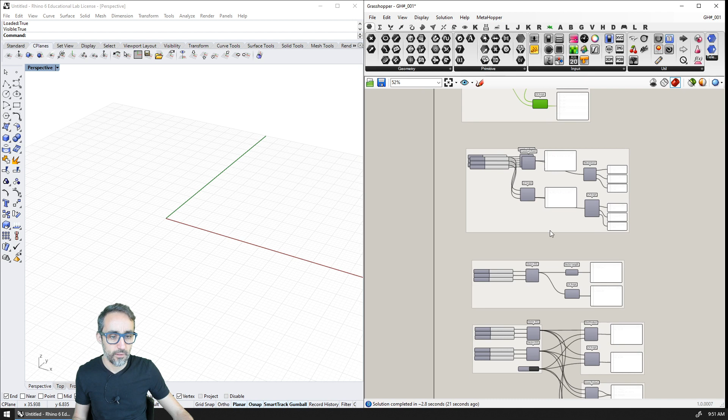Here, and here, and here, and here—where is that point coming from? Okay, we can probably just keep it there.

Random reduce, evaluate curve—I'm going to do evaluate curve today. Solid intersections and unions. Surface and curve analysis, I'll do a little bit of that. The basics functionality of Galapagos—that's a little more involved, we probably can't reach that today.

I don't think we'll get to cover that today. But doing a simple form of Galapagos, like an optimization process, isn't actually very difficult. The hard part with Galapagos is the UI and the genome and so on, but writing a component that does a small control heuristic search isn't that hard, and it's an interesting exercise. So maybe we could do that—I'm gonna write that down. That sounds interesting.

Like a simulated annealing exercise. That could be good—who said that? Karan. That could be an interesting topic for an actual stream, so thanks a lot for that. I'm gonna give it some thought.

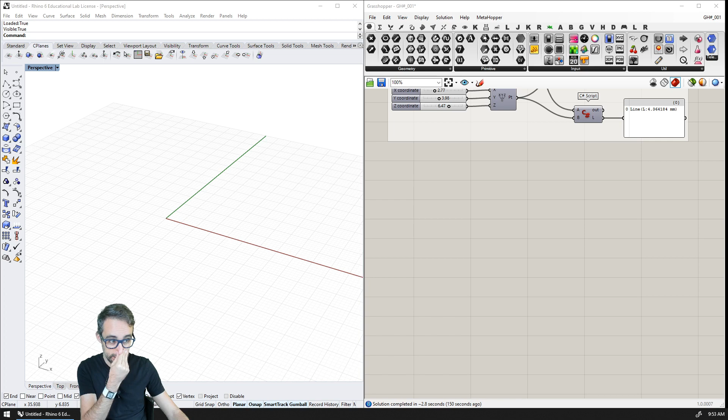So I think what I want to go over today is: I want to create an interpolated curve, having a bunch of points and creating a curve over them. I would like to evaluate a curve—given a parameter, can we find the tangent vector, the perpendicular vector, the perpendicular plane, the point on that parameter? We can also divide the curve into equal segments with perpendicular planes. I would like to loft a surface, and then evaluate a surface—given UV coordinates of that surface, get the normal vector, the perpendicular plane, and that kind of stuff.

Somebody suggested mass addition—we may want to take a look at that, I'll get back to it by the end of the stream. Again, think about which components you'd like to see, and by the end of when I finish with the ones I want to cover, we can have a small conversation, and then I can go back and do one or two of the easier ones.

Somebody's asking for forward and inverse kinematics. That's an amazing topic I do want to cover at some point, but more consistently. I teach a lot of robotics, so I want to make a playlist with basic principles of robotics, and maybe do our own robot here on Grasshopper—a robot with 3 joints, and use Galapagos to do inverse kinematics. It's not the most optimal, but it's a good, fun exercise. So maybe we can do that, but I want to do it more consistently, so it'll take some time to get there.

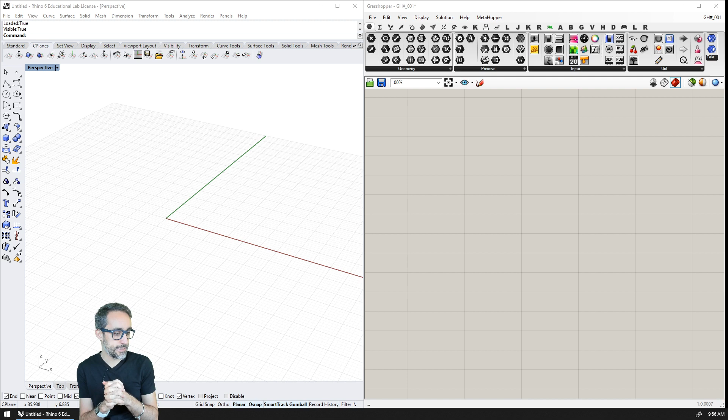Okay, so let's start with interpolated curve. Which one is that, by the way? It's here—Interpolate, create an interpolated curve through a set of points. So let me do like I typically do: I'm going to place a bunch of points, then pick them up and throw them into here. This is the degree, this is the periodic curve, and this is the knot spacing.

Okay, so we have the curve, we have the length, and we have the domain of the curve. This is going to be interesting. For example, I'm going to paste a 3 here for the degree, whether the curve is periodic or not. So that's going to be a toggle.

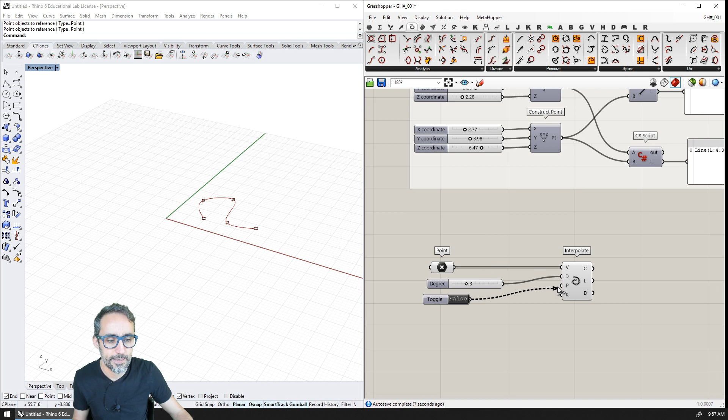And then the knot spacing is going to be chord spacing. I'm not going to bother much with that input, because it's a little complicated to explain, so we're not going to cover that today. And then the curve is going to be this, which gives me the actual curve, the length, and the domain of the curve.

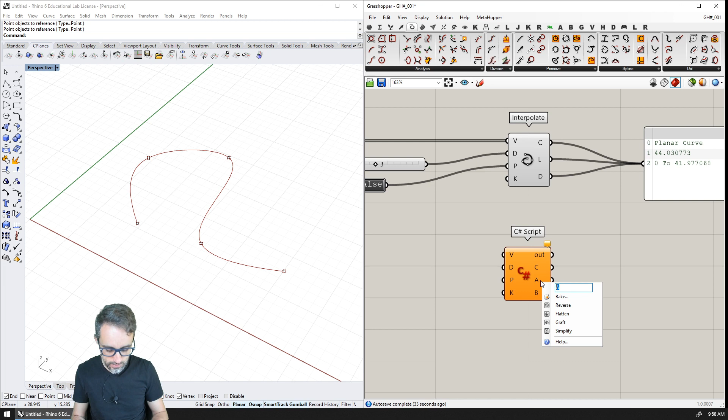Okay, and I'm going to move this down here. I'm also going to do this already. So this would be D, and then we have P, periodic or not, and the K value. And then here we have C, that's the curve. And then we have 2 outputs: L, which is the length, and D, which is the domain out.

Okay, and I'm going to toggle the parameters. I'm going to toggle them as part of the video.

Okay, also I'm going to pull up, I think it's going to be good, I'm going to pull up RhinoCommon Interpolated curve. I think this will be useful to explain what I'm going to do. Should I show this right away, or should I actually show how I got here? I'm going to do it from here so that I can show how I would get to that help screen. Okay, good.

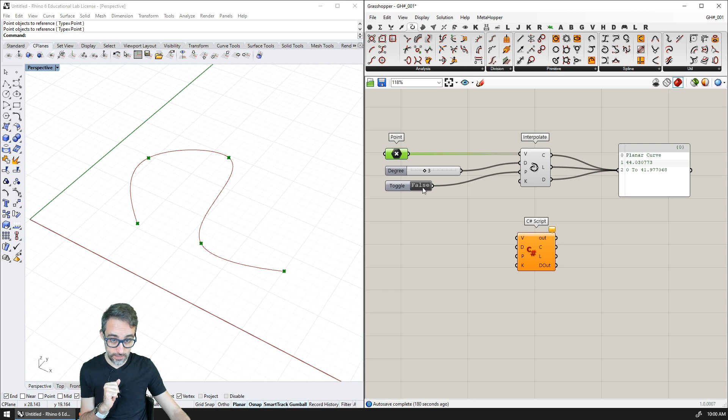So what you can see is that I already created a bunch of points in Rhino. I loaded them in here with Grasshopper. I set up parameters for the degree and the periodicity of the curve. And as you can see, the result of the component is this smooth curve that goes through the points, but also the length and the domain of the curve. I'm going to replicate all of these inputs and all these outputs.

So I already have a C# scripting component that I have dropped here. I have copied all the inputs and all the outputs, and a very strong reminder: remember that you need to right click on the inputs and set them whether you want them to be an input of a certain type. So for example, V is going to be Point3d, D is going to be an integer because the degree has to be... can the degree have a decimal part? I'm not sure it can, so I'm going to leave it as an integer for the time being. And then Boolean is going to be bool, and K is also going to be an integer.

Now, the one thing I need to remember is that this component takes a list of points, which means that if I leave V, the vertices, with item access, the component will not work correctly, because it will try to create one curve with each one of the items provided to it, each one of the points plugged in here. That's why we need to change the access level of the V parameter, the vertices, to list, so the component works with the full list of points and creates a curve through them.

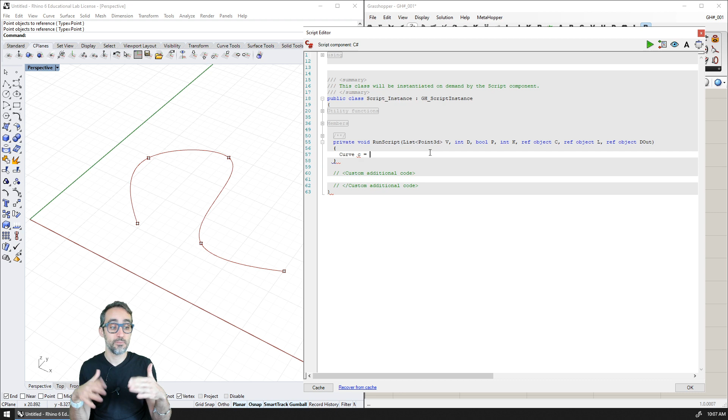What I'm going to do here is go back to my component and create a curve object, which I'm going to call C. What I mean by static is that in order to create this curve, I need to access the create curve, the interpolated curve method from the base class, the curve class. As you can see, as I press dot, all the static methods show up.

I have a lot of methods to create different kinds of curves, and I think the one I want to use is create interpolated curve. As I open my parentheses, I can navigate between the three overloads, the three kinds of inputs I can give it: the list of points, the degree, and the knots, or even the starting and ending vectors, which I'm not going to do right now because it's not part of what the component does.

So I think I want to stick to this one, where I need to pass first a list of points, that is V, coming from the input. I need to give it the degree, which is also coming from the input. And then I also needed to give it the curve knot style knots.

What is this? I'm not sure, I haven't done this before, but since this input is of type curve knot style, I'm thinking this is probably some kind of enum that, given some numbers, gives me the possibility of choosing what kind of periodicity and how the knots are handled in this curve.

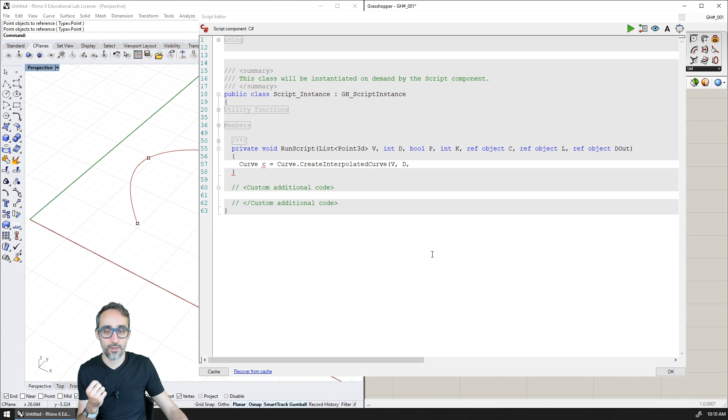So it looks like I may actually have to do some pre-processing in order to find out exactly which knot I want to use. Let me go back to Rhino and do that. I'm going to leave this not working for the moment, and I'm going to copy paste here.

This value, I think by default is 2 here. I'm going to paste that in. This is an integer. If you remember, the input says that 0 is uniform, 1 is chord, and 2 is square chord.

So what I'd like to do is implement a rule where, reading the knot style and whether the curve is periodic or not, I choose the right value here. How am I going to do that? I'm going to take the value of the chord, which is the same as in Grasshopper: 0 is uniform, 1 is chord, 2 is chord square root. And if the curve needs to be periodic, I'm going to add the value of 3 to these numbers so I turn them into the periodic versions. Very simple, so let me pre-calculate that.

I'm going to say knot style equals whatever the user is giving me as K. And if the input periodic equals true, then knot style is going to be incremented by 3 units. So now that I have that, I actually need to create a knot style enum.

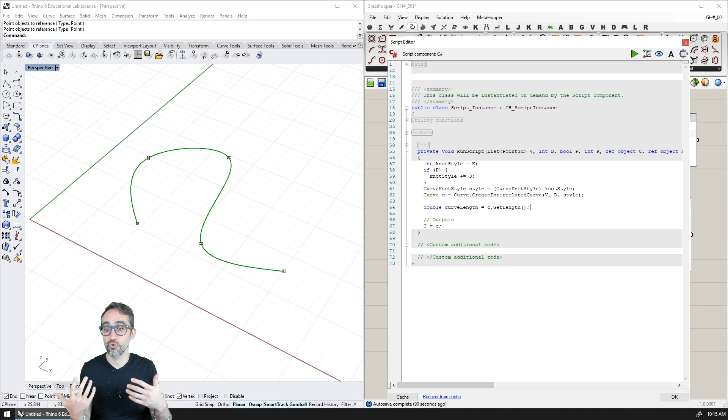Well, the thing with NURBS curves is that because they're mathematical entities, it actually takes, depending on the NURBS and the degree value, etc., some computation to figure out the length of that curve. It's not as easy as calculating the length of a vector, for example. So because it takes some CPU power to do that, it's something that objects don't have as information by default unless you ask them to give you that information. So that's why probably they chose to use a method here to get the length instead of just a property.

So let's see if that works. So if I output L equals curve length and I run that, I can see that the length is the same, so we're good.

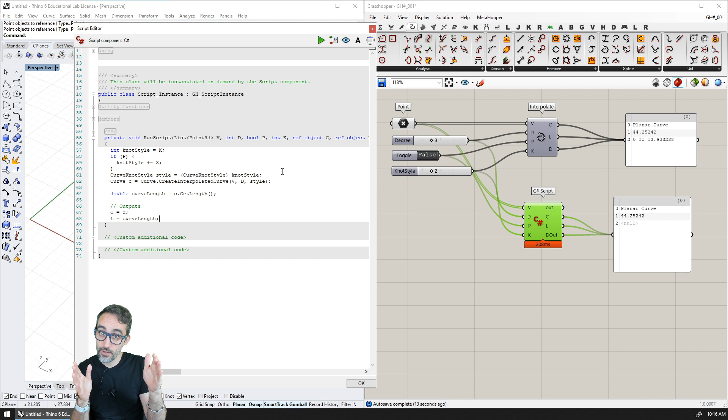And then the last thing that I need to do is figure out the domain of the curve. Remember that the domain of a NURBS curve is the range between which the parameter value goes. And the parameter, you can think of it as some form of relative length along the curve. It's not exactly that, but if you want to learn more about that, you can check my Harvard lecture, my Introduction to Computational Design course on YouTube, where I have some videos that explain NURBS curves in detail.

So remember that the domain in RhinoCommon terms is called an interval. So I'm going to say that this is going to be C dot, and there's probably something that gets the domain of the curve. So I'm going to take the domain and spit that out through dom. No sorry, this is not D, it's DOut. All right, so yeah, so there we go.

Now we have the component that takes a list of points, degree, periodic, and the knot style, and gives me all the information. It gives me the curve and gives me all that information for that curve. Okay, I think this was really useful because it's very basic and very interesting to learn about this. Nice, let's move on to the next one.

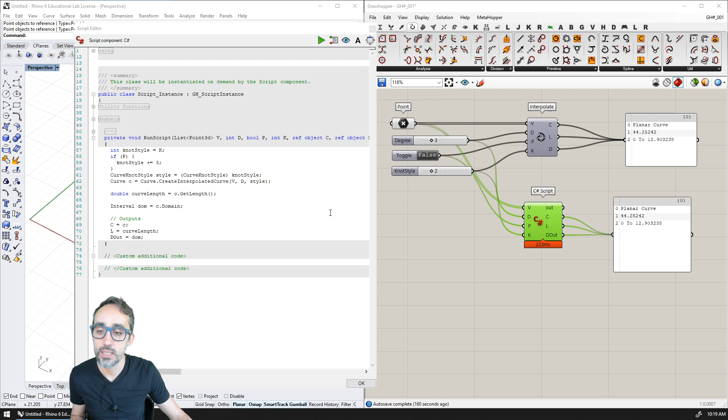Okay, so we got this, and the next one I want to do is evaluate the curve. So we can probably evaluate this same curve, right? Evaluate curve. So we take the curve, and then we evaluate that curve at a certain parameter. So I'm going to write here, for example, yes. So this is going to be the parameter, and I'm going to copy this, and it's going to give me the point, the tangent, and the angle.

So I'm going to now take a C# script component, and I'm going to take C. Can you guys see me? Can you guys hear me? All right, yes.

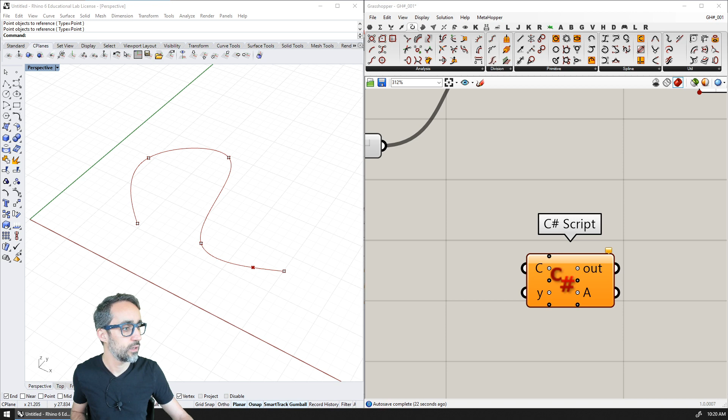Right, C, and then lowercase t. This is a curve, and then we want P, T, and A - the point, the tangent, is that? Yes, the tangent and the angle. We probably want that here, and we also want an out component, an out panel, and this, and this, and this. Okay, the parameter, and we're going to take the curve here.

Okay. All right, looking good. Now, so this is also going to be super interesting, I think. Let me save this somewhere that I don't lose it. Okay, good. Okay, let's get to this.

The next component we're going to do is actually super interesting because we're going to take the same curve that we just generated and we're going to evaluate it. Evaluate, in Grasshopper terms, means using a parameter value and then figuring out all the information that we can at that parameter value. This is a concept that we're going to explore now for curves, and we will explore in this video as well, also for surfaces, because evaluating geometrical entities, NURBS geometry, is a very interesting thing.

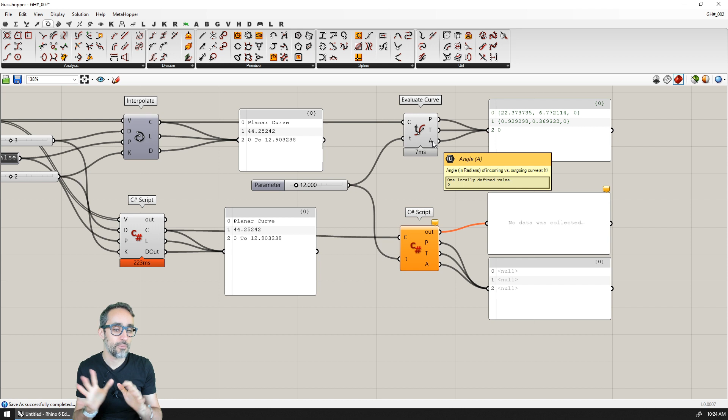That's an operation that is a little more involved, so I'm not going to replicate that for this component. Let's get started. The first thing we need to do is find the point at the parameter.

If I don't really know how to do that, the best way to find out is by going to the RhinoCommon documentation. So I'm going back here to curve. You see curve has a lot of things. For you guys, for homework, you have to sit down and look at the curve class and everything you can do. That is going to be my homework for you today.

But I know that if I try to find here on the curve class, point at, you can see I can get the point at the start and the point at the end, but I want the point at a particular parameter. So I keep looking, and you can see that Point At evaluates the point at a curve parameter. I think this is probably what I want. And yes, as you can see, the Point At method, which is not static, belongs to an instance of an object—a particular curve—given a t-value that corresponds to the parameter, which is where we are inside the domain of the curve, and it returns a Point3D object. So it gives me an actual point object. Very simple. This is the one we're going to use.

So here I'm going to say Point3D, P is going to be on the curve, so C, the curve I want to evaluate, dot Point At, and as an input I'll give it the parameter, which is t. Then the outputs are going to be this one. I'm going to click here. You can see that indeed, as I do that—I'm going to turn this off—my two points are the same.

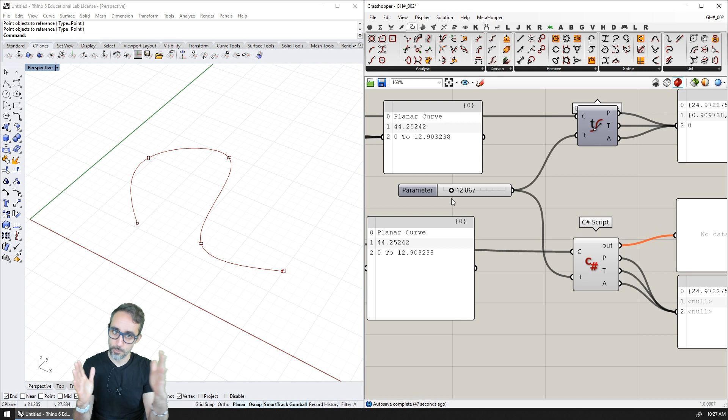And which value is that? Which value do you guys think it's going to be? Well, I'm going to respond right away. The value over which the component fails is 12.903, because at that point, when I'm outside the domain of the curve, I'm not inside the curve anymore. So because the curve is a NURBS curve and is defined by a polynomial, I can still interpolate in that polynomial outside the domain, but the results are not what I may want from the curve.

So we will, in a second, implement this warning sign so we can tell the user if they're doing something correct or not correct. But for us, we still get the same result. So that's fine. We'll get to that in a second, okay?

Also, a quick reminder: the fact that this curve starts at domain 0 is almost a coincidence. It doesn't necessarily mean curves always start with that domain—they don't always go from 0 to whatever number, okay? Just a reminder.

Now, what is the next thing I would like to find? I would like to find the tangent at that point. So is there such a thing in the curve class? Well, probably so. I searched for tangent, and you can see I can evaluate the unit tangent vector at a curve parameter. So similarly, there's a function where for a curve we pass the parameter value and we get a Vector3D object.

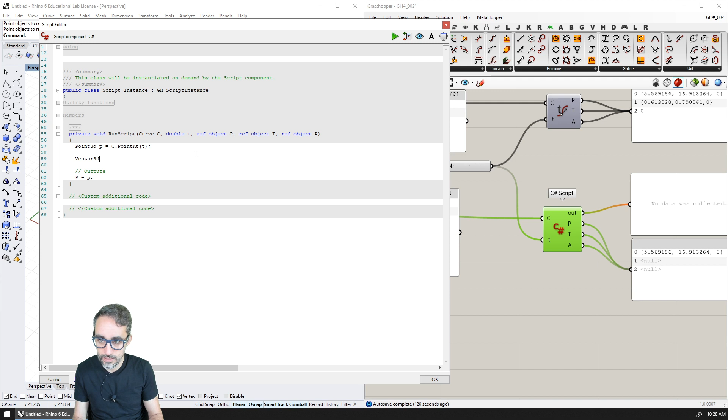So very similar as well. So we can say Vector3D tangent is going to be C dot TangentAt parameter t. And then here we can output that vector. If I click here, I get the same value for both. So we're good for this, okay?

As I said, I'm not going to implement the angle because it's a little involved, and I'd rather cover other things I find more fundamental. Now, what I would like to cover is adding this small UI notice to warn the user who is asking for a parameter that is not inside the domain of that curve.

That is actually very easy to do, but it also means we're going to have to work with intervals, which I find interesting. So let's do that. Before I do any operation, before I calculate anything, I'm going to do a check. That check is going to be whether the value of t is inside the domain of the curve.

So for that, I'm going to first take the domain of the curve. Can you give me the domain? There has to be something like domain dot includes parameter. So I'm going to create a variable called boolean is inside domain, equal to domain dot includes parameter. What this function gives me is I can give it a value, and it tells me whether that value is inside of this interval. The return is a boolean, a yes or no. So I can just pass in here the value of t.

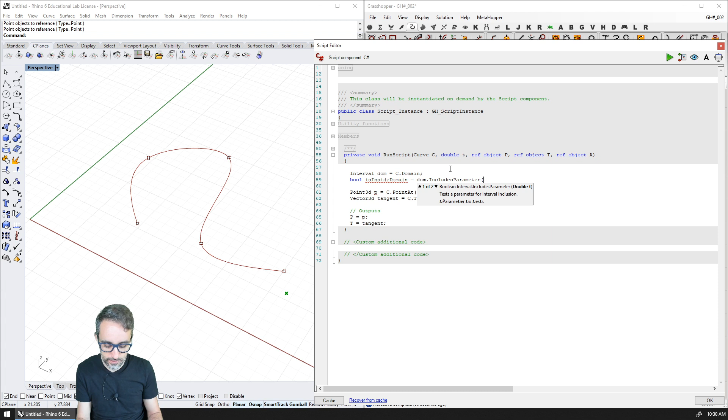And then I can make a check, and I can say if is inside domain, if this equals false, or a shortcut for this is if not inside domain equals true, whatever you fancy. Then here I'm going to write that warning message, but I'm not going to stop execution of the component, as opposed to some other times in the past, because we can still find data about it. It's just that we want to warn the user that the results might not be what he'd expect.

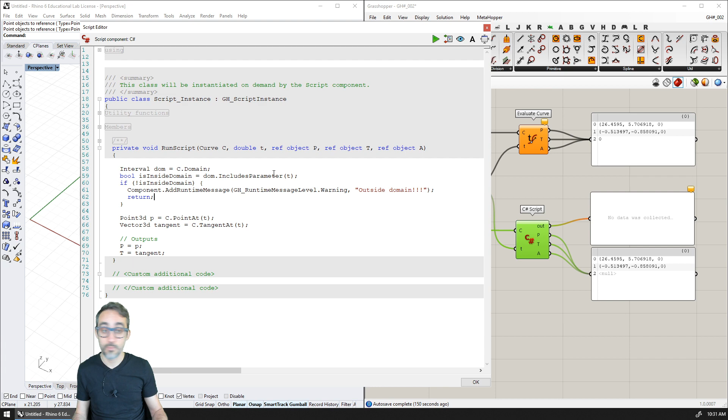So I'm going to say component dot add runtime message. The level is going to be a warning, and then outside domain. But I'm not going to stop execution - some other times, if the error is critical, I would have done that, but not this time because I still want to output the information.

As I do that, you can see that now I get the error message as well. And whenever I go below 12.90, then I am good. Wonderful. So I think with this, this can be - I think we're good to go.

So I think we're ready for the next component, which I believe I'm going to do. I'm going to take this curve and I'm going to divide it into a bunch of points. Let's do that.

Cool. All right, more stuff. Things are going well. Chat, my screen, my recording, my audio is working well. Do I have batteries? Yeah, I'm good with batteries.

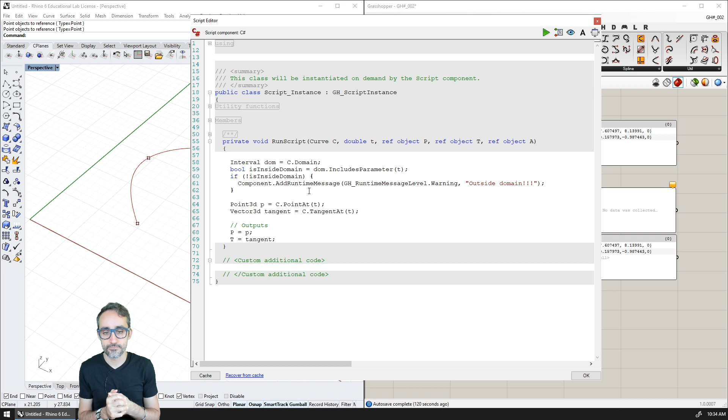Okay, while you hear me, I'm going to start writing the curve divide example. So divide curve. I'm going to take this curve here, I'm going to divide it by a number of segments. That's going to be an integer, and k is going to be whether I should split the segments at the kinks or not. What does that mean, actually? I don't know. Maybe we can find that out as we go. I'm gonna put it here, but I'm not sure what that is really.

And then C# script. I'm going to add here C, N, K, P, then another T, and then T.

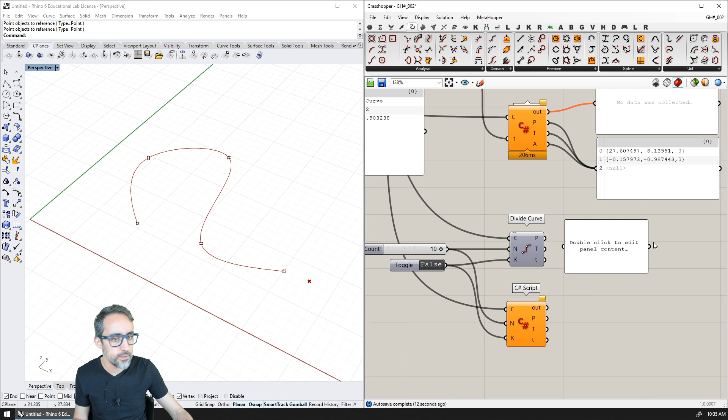I'm going to plug the curve in here, set the number of divisions, the split kinks, and so on. I'm going to put some panels in here to write out the list of points.

I'm just going to copy it here. This is the tangents, is that correct? The tangents and the parameters, which is super interesting because the component also gives me where along the domain those division points are, which is something we will need to calculate first in order to get the points. I'll show you in a second.

All right, I'm going to do some cleaning up and moving things around. I have OCD, so this will make life easier for those helping me with the files. Okay, are we ready? Are you excited? Do you like this? I should not be touching my face, right? You guys always tell me, but it's kind of relaxing.

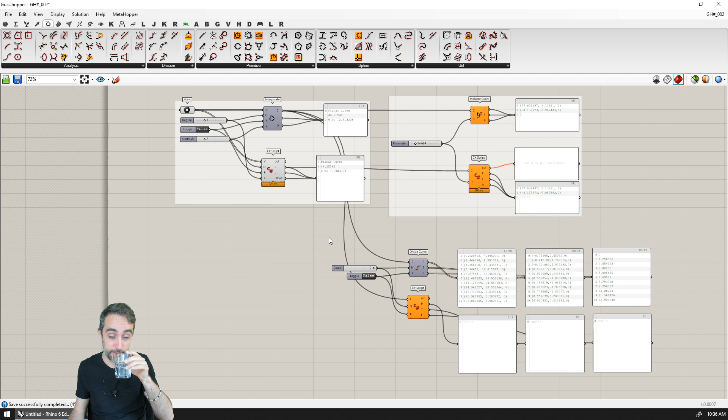I should also get some tea at some point, decaf tea, herbal tea. Did I tell you guys I'm quitting caffeine? I've been off caffeine for the past two months, since February 22nd or 23rd or something like that. It's been quite a ride. I'm not sure if I'm ready to commit to this forever, but it's been a really interesting challenge, I recommend you guys try it. I guess this is just another one of my attempts to be like Dan Shiffman, because he doesn't drink any caffeine at all. So it's just my subconscious like, oh, you want to be like Dan Shiffman, you have to quit caffeine, right?

Obviously I'm joking. No, I have not quit alcohol. I enjoy a beer or a glass of wine here and there, in moderation. Yes, I enjoy that.

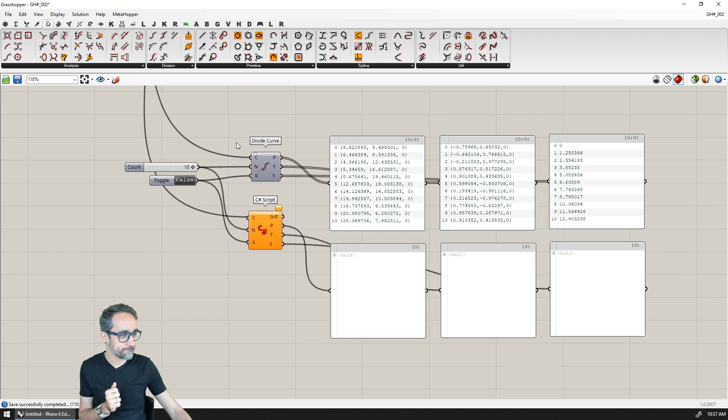So where were we? Salvador is asking, can we define the normals with the evaluate curve point?

Very interesting. If you think about this, for a curve you can define the tangent, because the tangent is unique, it is in the direction of the curve, within the differential plane of that curve as it rotates in space. But in terms of normals, a curve at any given point has infinite normals, because you can do the perpendicular vector to that curve with infinite rotations. What you do have is a plane that is perpendicular to that curve, which I will also do today in the videos. So the concept of a normal for a curve doesn't really have a strong meaning, because there are infinite normal vectors to a curve. What makes more sense is the concept of a perpendicular plane to the curve. The concept of normal is more important for surfaces, because a surface has two dimensions, so there is one unique solution to the normal. I'll cover that a bit later today.

Who was that? Salvador, yes. All right, I'm going to turn this off as well. And let's start now, let's get back to it.

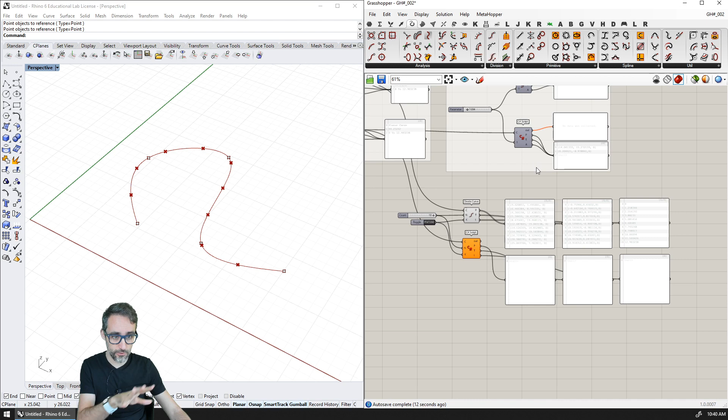So let's get to it. We're going to take the curve we just created and subdivide it into a list of points at equal length segments. Now, I've cleaned up a little of what I had before, and taken the curves we created before. I've used the divide curve component, which takes the curve and how many segments I want to divide it into, plus a Boolean parameter for whether I want to split the curve at the kinks. I'm not really sure what this does, so I may not even implement it.

But the output the component gives us is a bunch of really interesting stuff. It gives us actual points along those divisions, the tangent vectors for each of those points, and the parameter at which those points are along the curve. And I want to note something really interesting.

For example, we're going to divide the curve in segments that are equal in length, but you can see very interestingly that the distribution of the parameter doesn't correspond to the length of the curve. It corresponds to other stuff.

We can see that very clearly because if we have divided in equal length segments, you can see that the domain interval for the first part is roughly 1.25, whereas the difference between these two points is not 1.25, it's roughly 1, and the difference between these two is roughly 1.5.

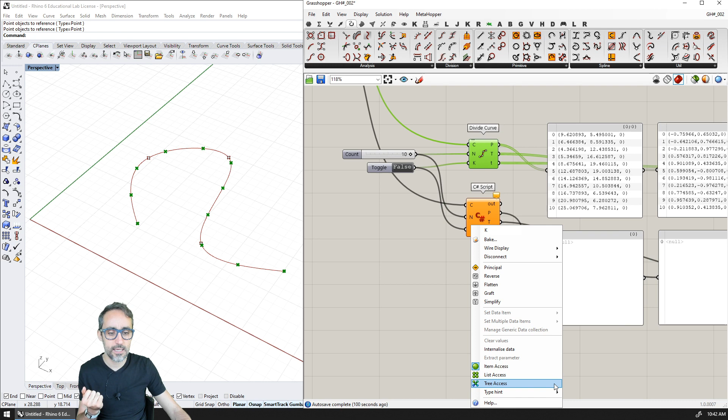So the distribution of the parameter is not constant along the length of a curve. This is a concept we need to remember, but it's fine because we will use RhinoCommon to overcome those problems. So I created my C# script component. I mimic the inputs and outputs, and I'm going to right click on each input to say C must be a curve, N has to be an integer, and K has to be a Boolean value. Now I'm going to start typing in the code.

Okay, I paused here because I need to think how to approach this better. And I probably have to check here, divide.

This split gives me curves, so I don't want that. So, divide between curves, divide by count. Yes, I think this is going to be closer to what we want - divide the curve into a number of equal length segments.

And it also gives me already the list of the division points. This point array will be filled in, and this is really nice. The divide by count gives me the return value - an array of the parameters at which we are dividing. So that is great because I need that as an output.

It also gives me as a byproduct the actual points on those parameters, which I thought I was going to have to do a for loop over these parameters and say curve.point at this parameter to find all the points, but it turns out it just gives me that. So that's pretty good - off the top of my head, we're going to use this method right away because it's going to give us a lot of bang for our buck. So let's get to it.

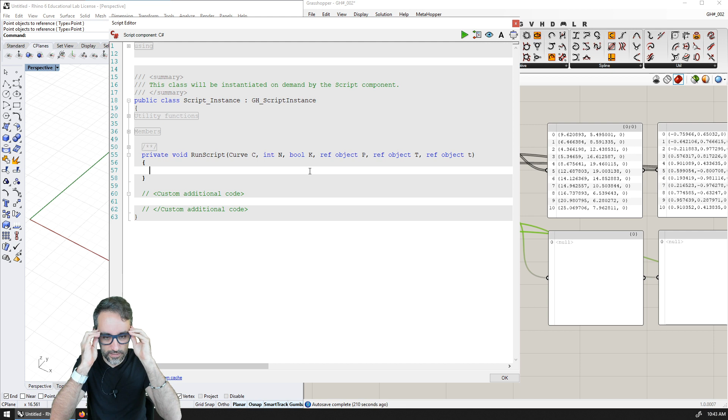As usual, before we start typing any code, I would like to plan what I'm going to do. And since I don't have all these things in my brain, I always have to look things up. So getting used to reading the documentation is a really good practice.

So I went ahead to curve, and I typed divide, and I found that there are a bunch of methods in the curve class that divide a curve by a lot of different parameters. So I can divide as a contour, I can divide by count, which divides the curve into a number of equal length segments. I think this is what I will want.

I also have divide by length, which divides the curve into specific length components. I think that's probably what's hiding under here - divide a curve into segments with a preset length. So if I wanted to implement this component, I would probably need that other function. But I think for this one, because I want equal length and the number of segments, I think this is the one I'm going to need here.

So I'm going to click on this one, which you can see returns an array of doubles. And if I look at the documentation, it tells me this is an array that contains all the parameters where those subdivision points are. This is really interesting because I will need that as part of my output, lowercase t.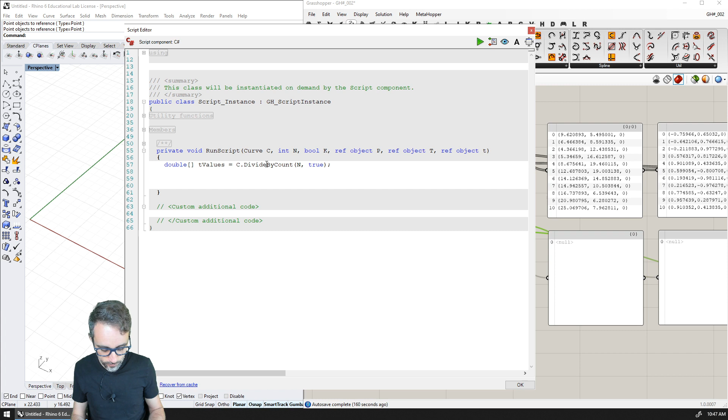Now the outputs, because what I just calculated was the t values, the parameter, so I'm going to do lowercase t is equal to t values. I'll output this, and you can see that my t output is already spitting out these values of where those points are along the curve, which is one of the outputs I want. So that's good, but I haven't yet implemented creating those points.

As I said, this is an optional thing because we have two overloads: the one that takes the number of elements and the boolean, which is what I just used, and the one which also takes in an array of points and returns that array populated with the division points.

So in order to do that, the first thing I need to do is create an empty array of points. I don't have to initialize it, I don't have to put any points in there, it's just a container, an empty bucket. Then I want to use the out keyword, and give this method the empty points array I just created.

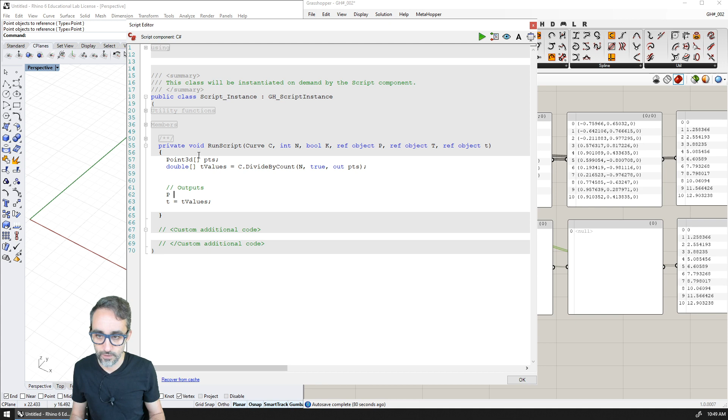What this method will do is crunch its numbers, and then on this empty array it will populate it with the values I needed. So if I output PTS as part of my outputs, we can probably see that I'm getting now all those points that the method had generated.

Awesome. I think the last thing we need to implement is figuring out how to find what the tangent vectors at those points are. I think that's going to be pretty easy, so let's get to it.

This should be just as easy as a for loop, going over all the parameters and then finding the tangent vector at that parameter, right? Yeah, I don't even know why I paused. My throat is very dry today, I don't know why, I don't know if it's the weather or what it is.

Okay, let's get back to it. You can declare an out variable in the method argument list. That is true, that is true.

So what Hari Prasad is pointing out is that there's a shortcut to what I just did: instead of declaring the variable before, I can declare it within the out argument. So I can create on the fly a new Point3D array. The only problem is maybe this version of C# doesn't accept that, but more modern versions of C# do accept this kind of syntax. But as I said before, when I teach, I don't like taking those shortcuts because I like making sure people have a clear idea of what we're doing. So for the time being, I'll leave it like this.

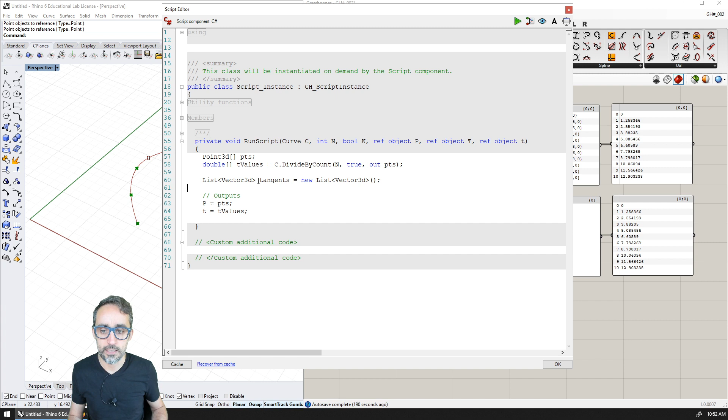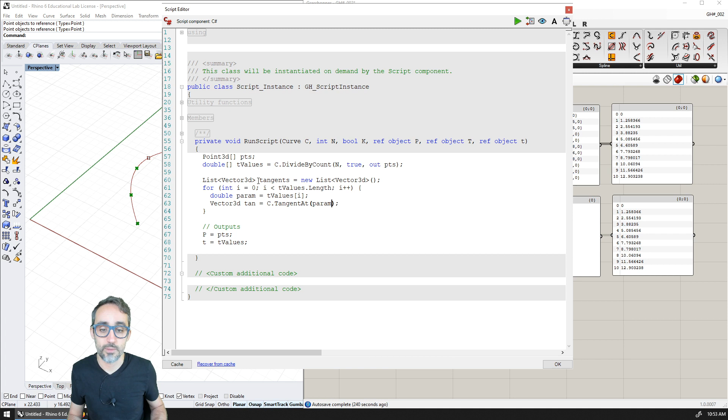Now the next thing I'm going to do with a for loop, I'm going to iterate over all the t values, and then for each one of those, I'm going to say double t. I can't use lowercase t because parameter is going to be t values dot I, and then curve dot tangent at, then parameter, and this is going to return a vector 3D object. So that's going to be tangent, which I'm going to store here, and then tangents, I'm going to add that vector that I just created to the list of tangents.

So t tangents, and I'm going to output this, and it looks like this is working.

So yeah, I think I didn't explain this correctly. What I did was with a for loop, I went over all the t values, all the parameter values. I cherry picked each one of them, turned it into a variable. Then to the curve, I asked for the value of the tangent at this particular parameter, which became this vector 3D. Then I added it to the tangents list, giving me this list of vectors. I think it works. They both work well. Great.

So this is done. Woohoo! So now we can subdivide a curve into equally spaced points and find a lot of information about those points.

I feel like the next thing we could do is something similar to this, but instead of just points, we can find the perpendicular vectors to the perpendicular planes to that curve. How does that sound?

Okay, is that what we're doing? Did I make a false promise? Let me double check my notes. Yes. There you go. Okay, so how's everybody holding on? Okay. I think I zoned out a little bit.

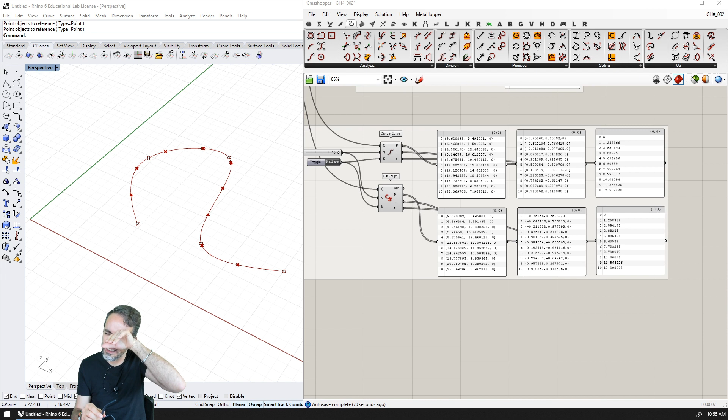Okay, so I need to actually implement this first. So, perpendicular frames. Yes. So we're gonna take the curve here, and what is it here? Number of segments and align the frames. Number of segments, align the frames. Nice. It's okay. Bueno.

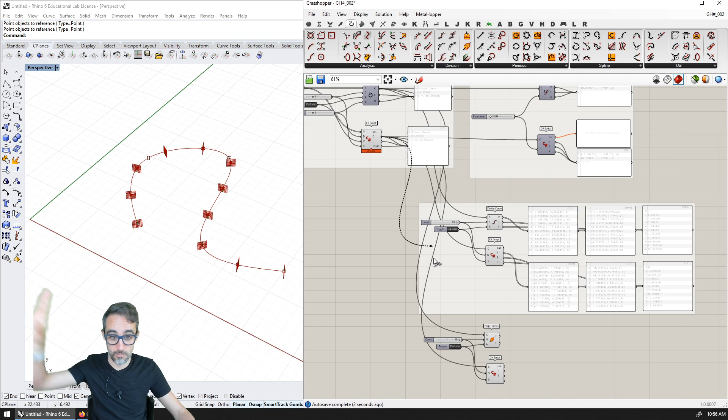It's funny how I say something and it takes like 30 seconds to reach you guys. It's kind of weird. I once gave a lecture, it was actually in Brazil. For those of you who are there in Novo Hamburgo, at the University Novo Hamburgo, I gave a lecture in English, but there was simultaneous translation. There was like a box with people in the back end, and they were simultaneously translating what I was saying from English into Portuguese. It's been the only time I've given a lecture live where there was live translation, and it was so strange because I would make a joke, and half the audience was listening to me and the other half was using the translation. So half the people would laugh, and then it would take 5 or 10 seconds for the other half to laugh. It was a very strange thing. Yeah, that was a long time ago. When was that? 2013, with my friends from UFRGS, from the Universidade Federal do Rio Grande do Sul, Mauricio, Julia. I had an amazing time there. I have to say, people were so nice, so warm, and so welcoming.

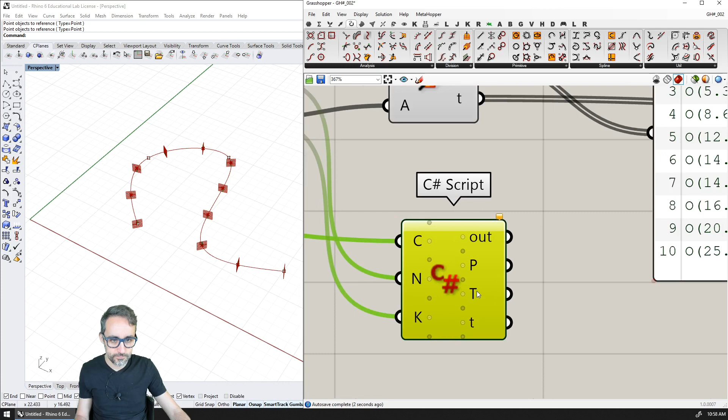Okay, so where was I? I got distracted, sorry. Did I copy this? Oh yeah. Okay, and then I'm going to paste this here.

Is there sound problems? Reverberation?

Okay, so I'm gonna turn these components off. I want to see the curve here. What is this? Align frames.

As I said, get perpendicular frames, a collection of strictly increasing curve parameters to place perpendicular frames on. An array of perpendicular frames on success, or null on failure.

I'm not sure how we're going to implement the align frames. I don't know if we're going to get them aligned or not. We may not get to do this here today. I don't know.

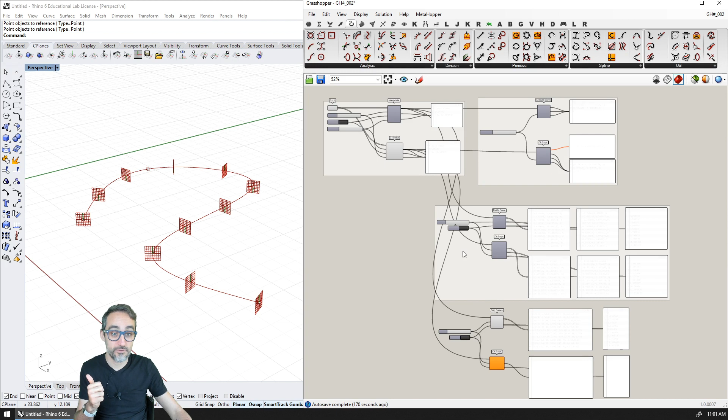Let's get to it. So I have spent some time in the backend taking the curves that we generated at the beginning and implementing here the vanilla perpendicular frames. This component takes a number of how many segments I want to divide the curve in, and it takes a Boolean value called align frames. What align frames does is it forces them to keep some kind of similar orientation among them. I'm not sure right now how we could do that. It may take us more time than I would like for this component, so I may not end up implementing that. We'll see how it goes.

And here I have placed the C# script, so I need to change this to A. I forgot, and then, as usual, I have to remember to right-click here. C has to be a curve, N must be an integer, and A has to be a Boolean. Okay, and we are ready to go.

Now, I have done some research and I found that the curve has a method called get perpendicular frames, which needs an array of parameters. It needs a list of parameters, so at which points do I want to find those planes. And then it returns an array of planes. I think this method is great, so we're probably going to use this.

But first, in order to use it, we need to compute those parameters. We're going to do exactly as we did before in the previous component. So you can see that double parameters, t values is going to be equal to c dot divide by count, and then this is going to be n, and this is going to be true.

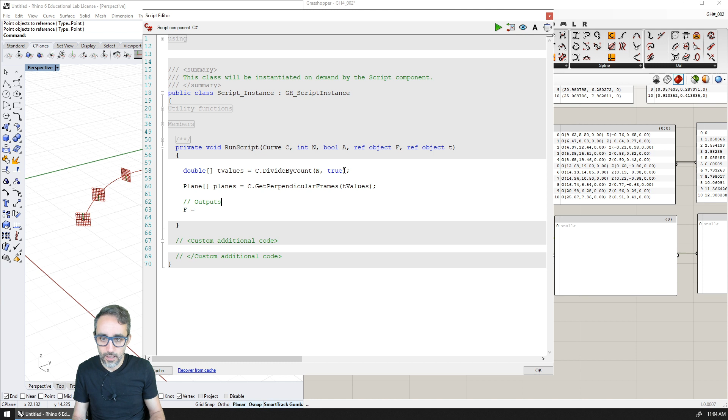So I'm going to do that, and then, as I said, f is going to be the outputs, f is going to be the planes, and then t is going to be the t values. Is that correct? I can see that I get the planes, I get the parameter values.

The only thing is that, as you can see, it looks like my component is by default aligning all those planes, whereas the other one needs you to specifically tell it to align those planes. I'm not sure exactly why that is, but you know what? I'm going to take a pause, do some research, and get back to you, okay?

All right, I think this has to be something as simple as: if we say true, then the component is probably just finding the points on the curve and using the tangent to create a plane from that. And if we're using false, and not aligning, it's probably using the other method. Let me do a really quick test to see if that's correct.

I'm going to copy this here so I don't lose it. What if I do this? I'm just going to create these two variables, and then if A is true, we're going to compute them in a different way than if it's false. If they have to align, then use the technique I just explained, and otherwise...

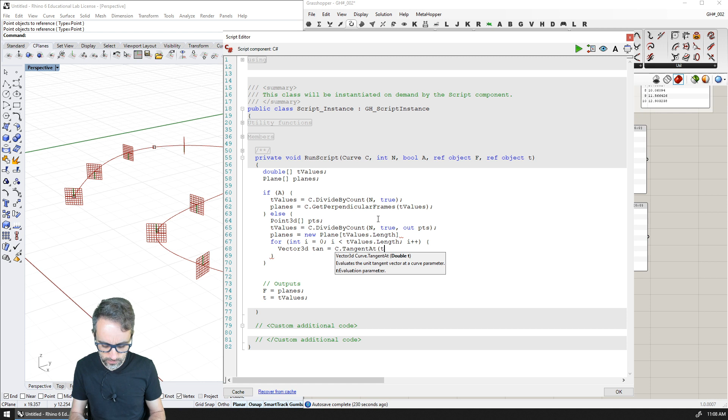So t values I, and then planes at position I is just a new plane with the origin, so PTS I. Can I do a plane with a center and a vector, right? Yes, so PTS I, and then that vector. Is that correct?

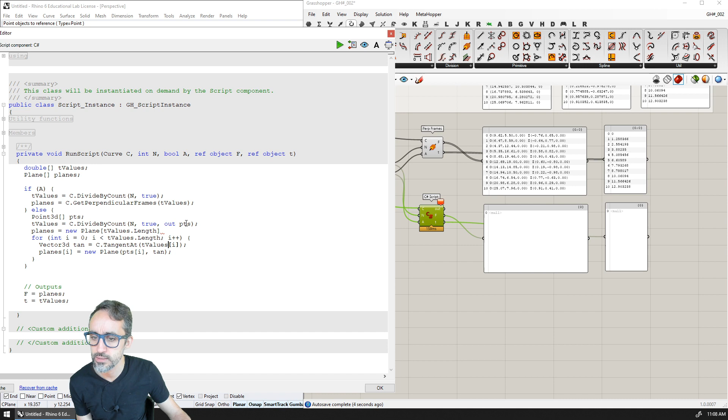Expected line 66. So if this is false, these are not aligned, and these are also not aligned, right? Okay, so are they equally disaligned? Yes, they are, so they are overlapping. And if I now choose true, everything aligns because it's using the other method.

Okay, so it looks like that was the difference between the two versions. I'm not sure why you would want the planes disaligned, honestly. Maybe this method takes more computation than the other one, but it looks like it really doesn't matter that much. I guess we can just explain this for the sake of completeness.

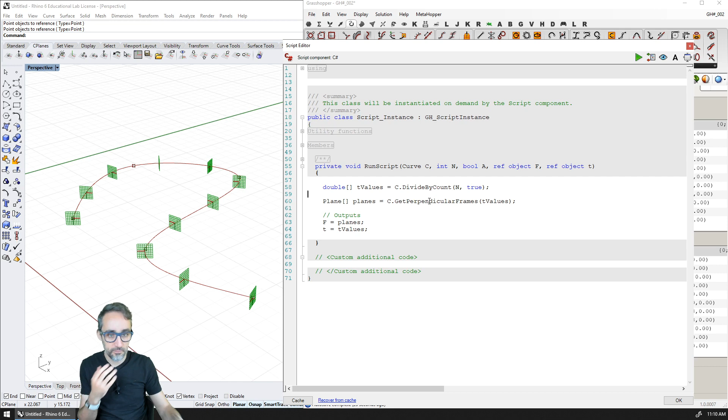Okay, I'm going to take this out and paste what I had before. So, okay. Okay, so how am I going to explain this? How am I going to explain this? Well, just explain it the way I just did it, right? Okay, let's just go with it and see how it goes.

I did some research and a quick test, and my suspicions were right. The difference between this component when you do not align the perpendicular frames - you can see this one has a different alignment than this one, and this one has a different alignment than this one. The difference between not aligning and aligning them, so now they're all aligned, is the way the component creates those perpendicular frames.

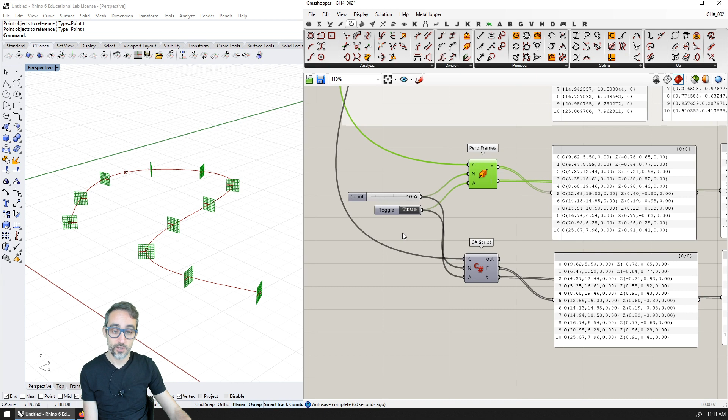Turns out this method already gives you a set of planes that are aligned with each other. But if we don't want to align them, it's just as easy as making a similar process to what we did before: we calculate the center by subdividing the curve in parameter values, find the point, find the tangent vector, and create a plane centered on that origin with that perpendicular vector. Remember, the solution to a plane created from an origin and a vector has infinite solutions, because that plane can be rotated any degrees around the perpendicular vector. That's why the planes we create are not aligned with each other.

It seems that this method is already taking into account the orientation and is trying to match all those orientations, which is nice. But I'm just going to implement what I just said, just for the sake of completeness and to give another example of how things can be focused.

Okay, so what I'm going to do first is declare that I'm going to do some resorting. My component needs to end up calculating both an array of parameter values and an array of plane values, because that's what I want to output. If the user told me that I need to align them, I will calculate those t values and plane values in a different way than if the user told me not to align them.

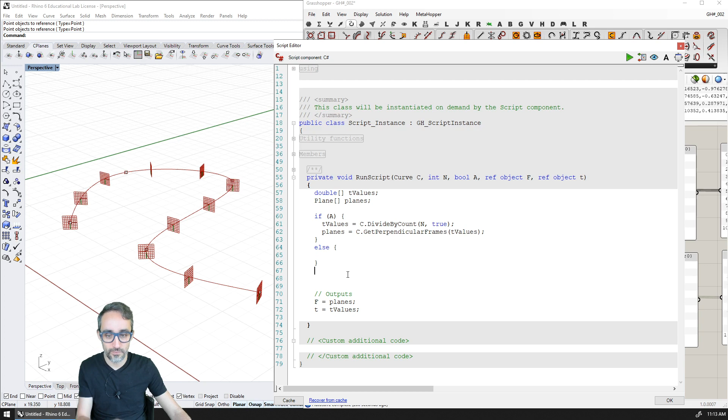And we already had the solution for alignment, which was this one, so I can paste this here. The only thing I need to remember is that because I declared t values before, now I don't need to declare it anymore, I just need to populate it with values. Actually, sorry, this is not correct - this is for alignment, so if we want to align them, this is the code that we need to use. And if I run this, this works.

So true, false. Oh, I have... okay, I'm getting an error. I think the error is because I haven't really filled in here. Anyway, so let me continue with this.

And now what I'm going to do is, if I don't want to align them, then it's just as easy - I need to figure out the parameter values for those divisions, figure out the points at those parameter values, figure out the vectors at those parameter values, and create a plane that is centered on that origin point at the subdivision, with that normal equal to the tangent of the curve. So I can do that very simply.

I can say first I'm going to copy this, but now I also want the points at this subdivision. So I can say out PTS, and then before that I can create a Point3D array called PTS, just like we did before. So now I have all those points.

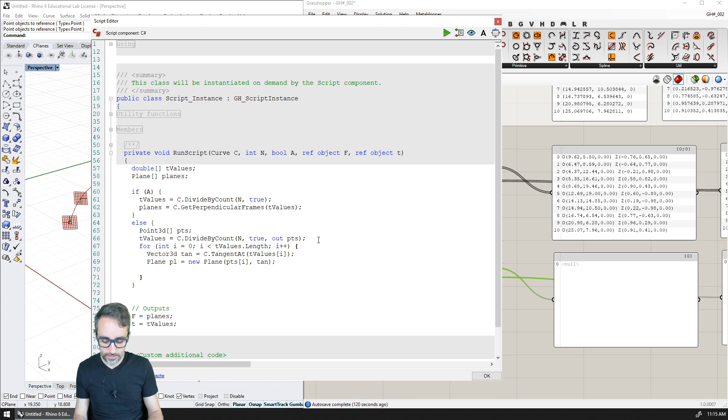Now I'm going to iterate over this, which is going to be equal to t values dot length, and for each one of these parameters and each one of these points, I'm going to compute the perpendicular vector, the tangent vector. This is going to be equal to c dot tangent at t values - t values square brackets i, so each one of the parameter values. Then I'm going to create a plane called PL, which is a new plane using an origin and a normal. For the origin, I'll take the value of the points at the i location, and for the normal, the tangent I just computed. Then in planes at position i, I'll store that new plane I just created.

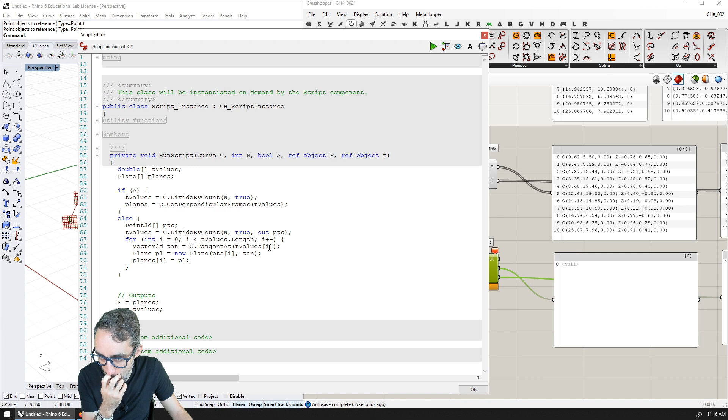Let me see if that works. Still doesn't work. Where is this? Okay, hold on a second. Yeah, what am I doing? What am I doing that I wasn't before? Planes... 70 unassigned. Oh, I need to construct - yeah, I need to set the length.

Okay sorry, yeah I forgot, because here I declare the planes array but I didn't say what size it has to have. I don't need this for get perpendicular, because that method takes care of creating a new plane array and assigning it to here. But here I need to create an empty array of planes before I start populating it with values. So I need to say plane, and then the length - that's going to be t values dot length, how many elements this is going to accept. And once we do that, that should be good.

And you can see now that false gives me planes that all have the same non-alignment, and true gives planes that all have the same alignment - they're all aligned with each other.

All right, so another one is done. Another one bites the dust. Boo! Another one bites the dust. Boo!

Right, so what are we doing next? We're going to loft a surface along a set of curves.

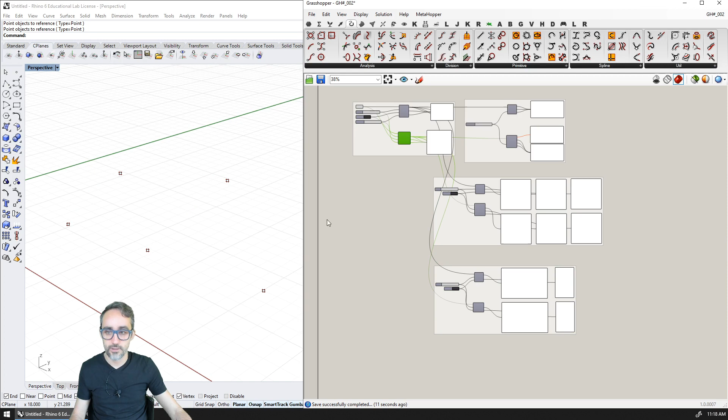Yes, loft surface. Okay, so I need to turn all this stuff off. I'm going to internalize these points so that I can remove them from the screen. And then what am I going to do? I'm going to create a bunch of curves here.

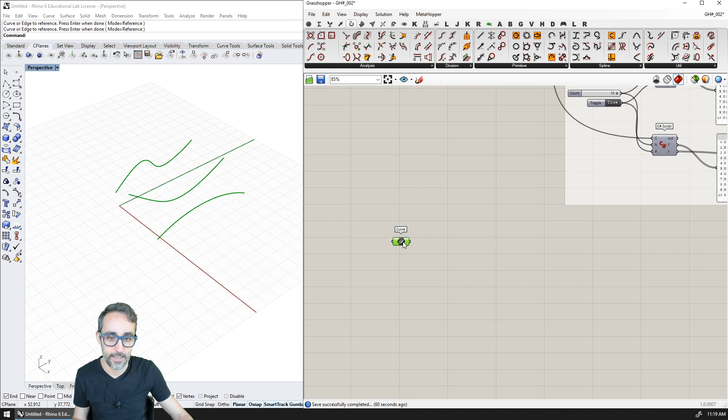All right. Okay. And then I'm going to create a curve, and I'm going to pick them up in the right order, and I'm going to loft the curve, and loft options.

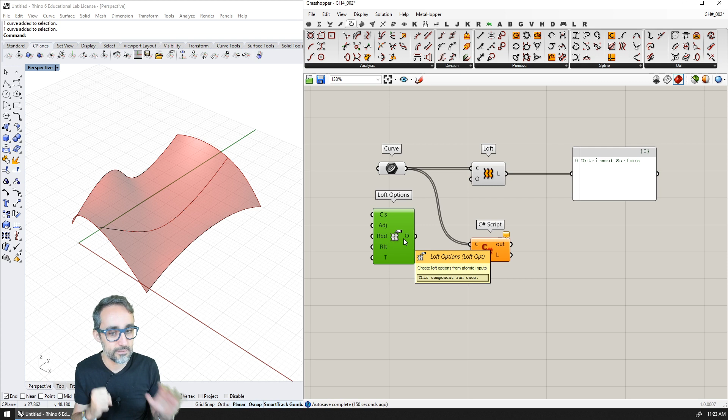I don't think we have that possibility in C# scripting. We cannot create loft option component objects. So what I may do is mimic some of these inputs straightforward as part of the regular inputs for this component. I want to make sure we remember that the input of curve must be a list, because we must be able to see all the curves as a list, and that options, whenever we get to that, we will figure out what this O should be.

Okay, now let's get coding. Oh, you see, I forgot - this input reads list of objects, but I want this to be curve because I forgot to specify that this must be curves. This is a really common mistake, I make this all the time. I forget to specify the types. Okay, now don't forget. That's why I've been doing this consistently for all the videos.

So let's get to it. But as usual, the first thing I'd like to do is go to the documentation and figure out how we can do this. Before we were exploring the curve class, but I don't think we'll be able to do that anymore, because if we're creating a surface, then lofting will be part of the surface class or the brep class.

So let me just write here on the general search - let me just create loft. What you can see here is that loft, create from loft, belongs to the brep class. And there's a lot of things - this is a really complex method to unpack.

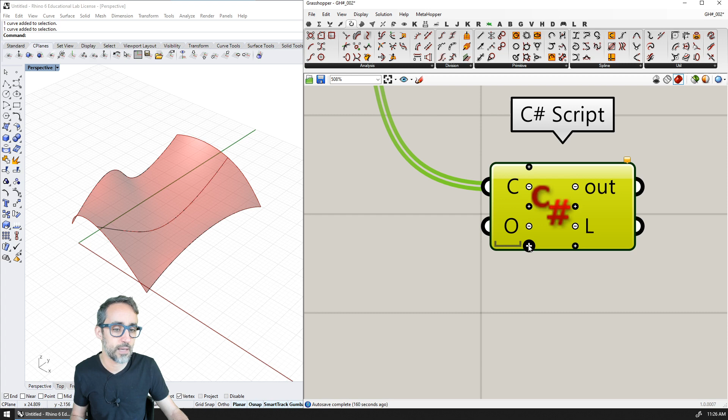So these are some of the parameters that are part of the loft options. For example, whether you want tight, normal, loose, straight, etc. So what I'm going to do is add a T parameter here, which is going to be an integer, so I can specify how tight or not I want the surface. And I'm also going to add a CLS input, to specify if I want the loft to be periodic, which is a synonym to closed. So this is going to be CLS, which has to be a Boolean, and T, which has to be an integer.

Okay, so I think we're in pretty good shape. This is going to be super easy once we understand what we can use and what type of inputs. I'm actually going to copy paste this here so we can take a look. Okay, it looks terrible, but the way I'm going to do this is brep, and I'm going to call this an array of breps, and I'm going to call this surface. I'm going to use the static way of calling this method.

Brep.CreateFromLoft. You can see this specifies all the inputs I can give it. So the first one, the list of curves, is going to be C, coming in from my inputs. The start and end points, I don't want to care about those here. So that's why, as per the documentation, instead of giving it an actual point, I'm going to use Point3D unset for both.

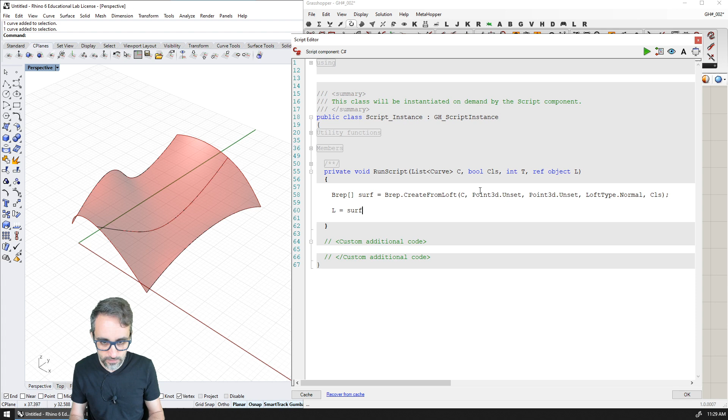Let's see if this is working correctly. I'm going to paste here, turn this off, and as you can see, this is already giving me the surface that I want. So toggle, Boolean toggle, and I can close it, I can wrap it or not with the CLS component.

But now let's explore the Boolean, the Loft type. The Loft type is going to be an integer, remember, let me bring this again. Options Loft, as we have here, is going to be an integer: 0 is normal, 1 is loose, 2 is tight, 3 is straight, 5 is uniform, just like we had it here.

Before I get into this, I'm going to define a variable of type Loft type, which is an enum. L type is going to equal Loft type t. What I'm doing here is taking the integer, remember the problem we had before where we couldn't use an integer to define an enum. So I'm taking this integer value and casting it to an object of type Loft type. C# then figures out if it can convert this integer to something that fits Loft type. And then I'm going to use this here.

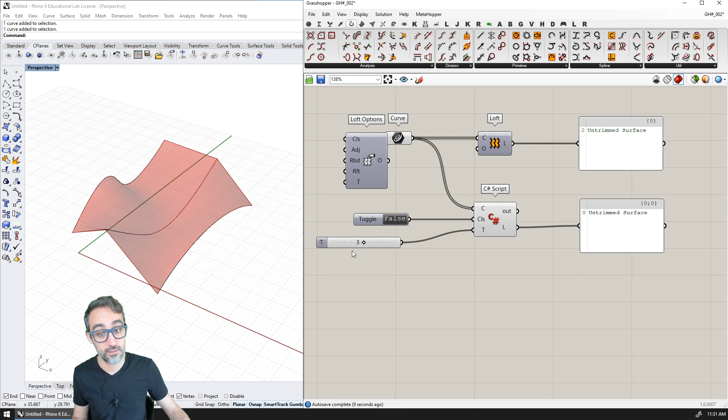And then the Loft, you can see—oh this is terrible, this should be 5 or 6 stops. So 0 is normal, 1 is loose, 2 is tight, 3 is straight, 4 is non-existent, and 5 is uniform. So there you go, that was pretty easy actually. The only complicated thing was finding in the documentation 'create from Loft' and breaking down exactly what this whole thing means, but aside from that it was pretty straightforward.

Good, and last but not least, we're going to evaluate a surface. That's also a really good exercise, just like we did before. We had the curve and we evaluated it, we found information about that. We're going to do the same thing with the surface.

I'm going to take a second. Okay, I'll be right back, give me a minute.

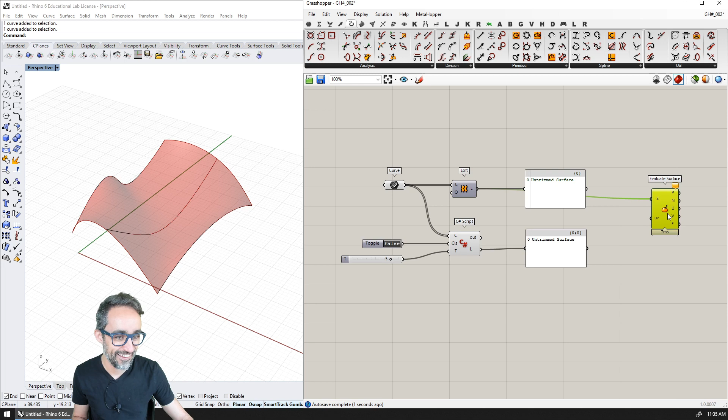Okay, so now let's evaluate the surface. Whoa, that is a lot of stuff. And then UV, okay so let's create, let's construct a point, and let's do, for example, X and Y. So that way we get the point, we get the normal, we get the U direction, the V direction, and the perpendicular frame. That's quite doable.

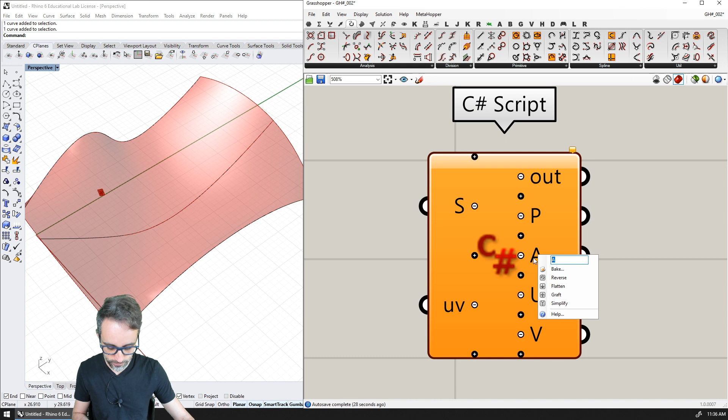So let's do C#, and this is going to be S, and this is going to be UV, and outputs are going to be P, and then these are going to be U, V, and then I need the normal here, and then I need F. And I'm going to plug in a panel here—point, here and here. And then point here, here, here, and here, because we have nothing yet: the surface, the point.

All right, well let's get through this because I have meetings all afternoon long. So let's do this.

Cool, and I think I may wrap up this video. Maybe I'll do one or two more components as a bonus, but I want to wrap up what I wanted to say today by doing a very similar exercise to what we did before, which is we created a curve using some points and interpolated it, and then evaluated that curve, finding information about it along the parameter.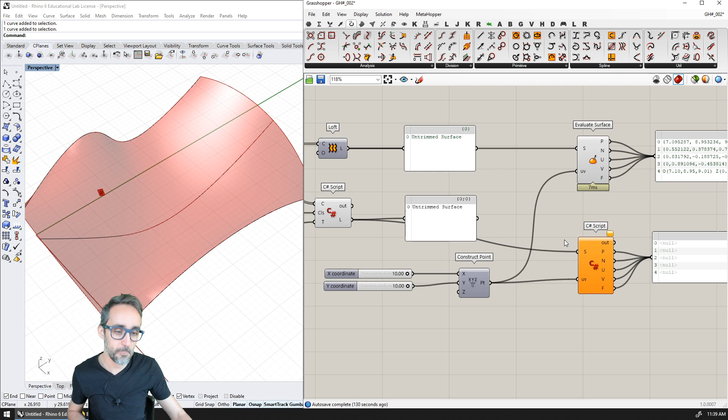I have mimicked that in C#. I have plugged in here the surface, and I'm going to right click and say that this has to be the input type of surface. And then here UV, I'm also going to right click and say that the input has to be a Point 3D. As I do that, I'm going to open my code editor.

But before we do any coding, I would like to go to the surface class and take a look at what methods might be useful for me to find a point, a normal, a frame, and such. So I'm going to search here for surface, see if I can get to the surface class. NURBS surface methods and NURBS surface class. So it turns out that yes, there is a lot of stuff here. This is the NURBS surface class, and it gives me a lot of properties of that class.

But it also gives me a lot of methods. So I can find the closest point to that surface. I can create a curve on top of that surface. I can create surfaces from points. I can find the curvature. I can find the degree. I can find the domain. I can evaluate a surface mathematics. There's a lot of things that you can do.

I can use Frame At, so this would probably be very useful. I can find the frame at a particular U and V, and it gives me the plane. I can probably, what is Evaluate? What is this giving me? Here it gives me, for example, a point at a particular given UV parameters, and it gives me two vectors, which are the derivatives. So basically, that is a way of saying those are the two tangents of that surface at that point. That could be really interesting.

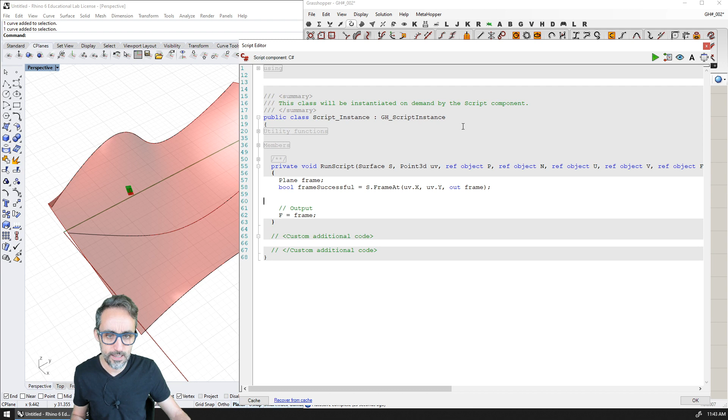But let's continue. Let's now use the evaluate method to find information about this surface at this UV. Oh, it's been a long morning, huh?

I'm going to follow a very similar approach. So evaluate is giving me a point and an array of vectors. I'm going to define those two beforehand: Point3D point, and then Vector3D array derivatives, and then Boolean success.

Evaluate success is going to be equal to s dot evaluate frame, evaluate surface, and then uv.x, uv.y. Then the number of derivatives means how many times do I want to perform derivatives on this surface.

How can I explain this? The first derivative of a curve is the slope of that curve, and if I do a second derivative, I'm calculating the slope of the slope, and so on. So long story short, I want to use the value of 1 here, I think.

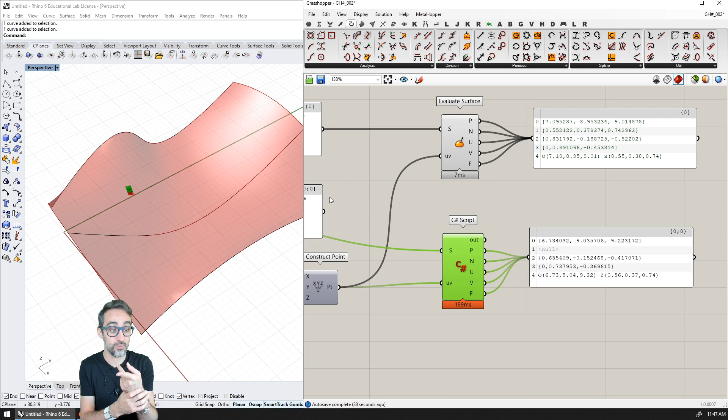That is correct, but I need to double check that. So Vector3D normal is s dot normal at uv.x, uv.y. And as we do that, n is going to be equal to normal. And we have the normal here.

So I have noticed, I think what we've done is correct, but I think there's something wrong about how the two components find the UV space.

I think probably the evaluate surface is doing some pre-processing of these values, and that's why we're getting different locations for the plane and for the point. So maybe this component is actually normalizing the domain and reparametrizing it. I am not sure about that.

But I'm not going to solve this right now because it's been a long morning already. So I may just figure it out later and do a small piece in the next video, and add the solutions of why these two values are different. Okay, but this was basically evaluating a surface.

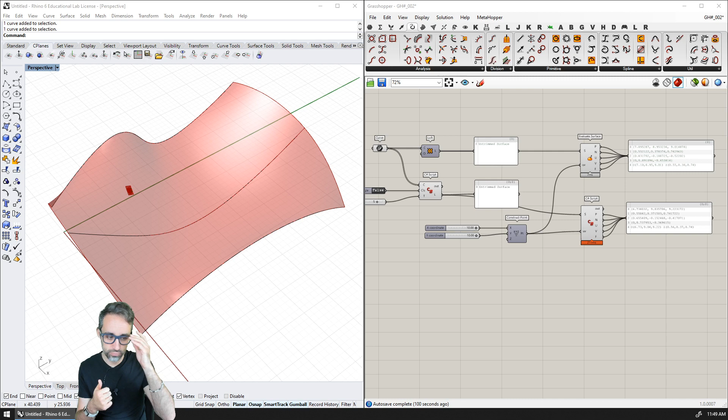All right. Okay. I see YouTube is telling me that I'm having connection problems. Are you guys seeing the video? Is the video choppy? Is the audio choppy? Quality? How are we doing?

Okay, you guys still there? I can see you. Okay, so I'm going to record. I think I'm going to... Well, let me just say, do you have, I have time.

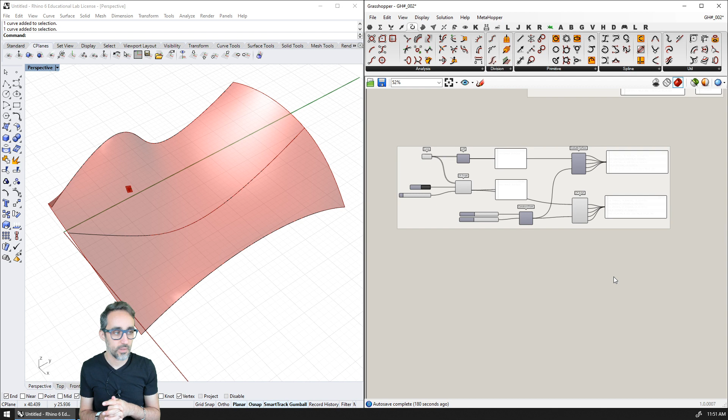It's the surface closest point component to get the UV. Clean tree, nah, that's a little bit. So we could use surface closest point, perhaps. Brep closest point, surface closest point. We could do this point, coordinates of the point, and distance between sample and point. This could be interesting - surface subdivision, mass addition. Okay, I think I'm just gonna do surface closest point just because we have it already. We have the surface, and it's an interesting one. So let me just do this.

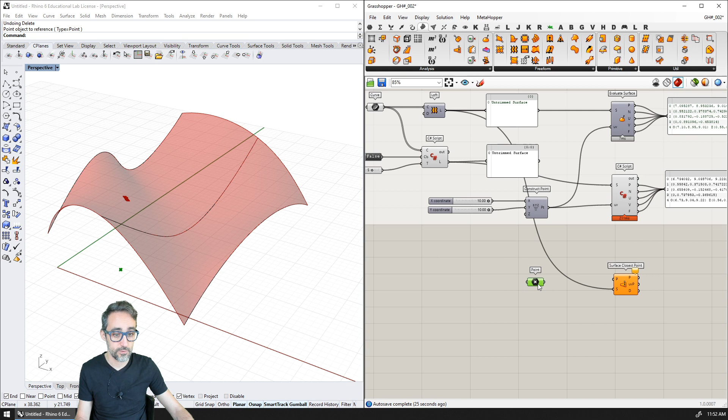So we have the surface here, and then I'm going to put in a point somewhere here, for example. I'm going to internalize that point. Okay, and I'm not going to clear values, set one point. Okay, and then this is going to be here, and C#. So this is going to be surface, P. This should be P out, and this should be UV of the point, and this is the distance.

Oof, well, I'm really tired today. This was intense. I don't know how you guys deal with this. This, and this, and then here, this, and this. Okay. All right.

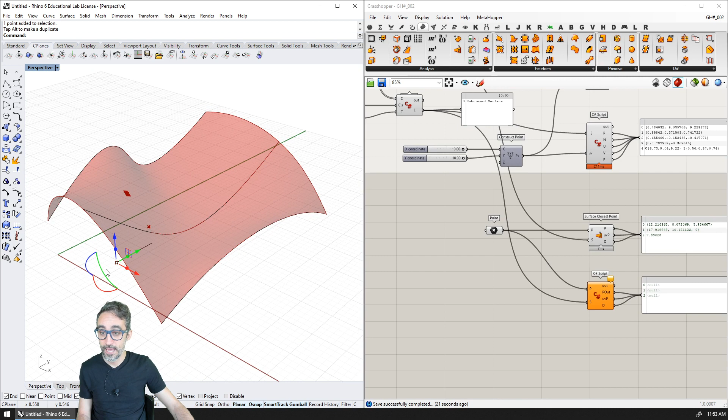Okay, let's do this. And last but not least, requested by the audience live here on the stream right now, I'm going to do surface closest point. I think this one should be pretty straightforward. This is a component that basically takes any point in 3D space and computes the most proximal point on the surface to this point. It gives us the point on that surface, it gives us the UV coordinates of that point on the surface, and it gives us the distance between the original point and the point that we just computed. So this should be pretty easy.

If we look at surface, I think there is closest point. We should be able, yeah, so there is closest point. So here you can see we have Boolean closest point, we have the test point, and it gives us the U and V parameters, which then we can use to evaluate the surface on that U and V parameter. So that should be pretty straightforward to do.

As you can see, I have forgotten to set the types of my inputs. So I need to right click here on P to say that this must be a point 3D, S must be a surface. Let me look again at closest point - it was a Boolean, the return is a Boolean, whether it found the point or not. Then the test point and the out is U and V. Okay, so I'm going to define U and V as the outputs that I need to find. Then I'm going to say success is going to be equal to surface dot closest point. Then the point that we want to test is P, and then out is going to be U and out is going to be V. Let's see if that works well.

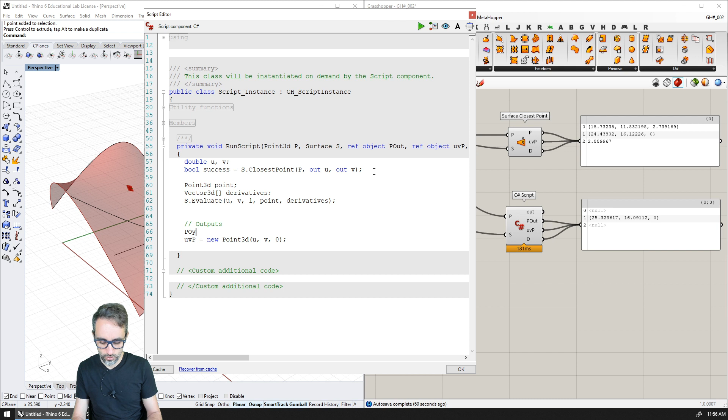So, and then what else? P out - well, so now we need to find the point. So I think we used to use evaluate, and this gave us the point and the directions. So that's fine - point 3D, point and vector 3D array derivatives, and then S evaluate. So U V, one derivative, then point, then derivatives, and so here P out should be the point that we just calculated. Is that correct? So there is something that is not working here. Oh, I forgot the out keywords here. Yeah, so again, the point is kind of close. It's not exactly the same for whatever reason. I need to take a look at this.

And then the distance is going to be super easy. Double D is going to be point distance to the point that was coming from the input. And then as the output here, we can just do that. And because there's a slight offset here, the distance is not exactly the same either. Okay, so this looks good to me.

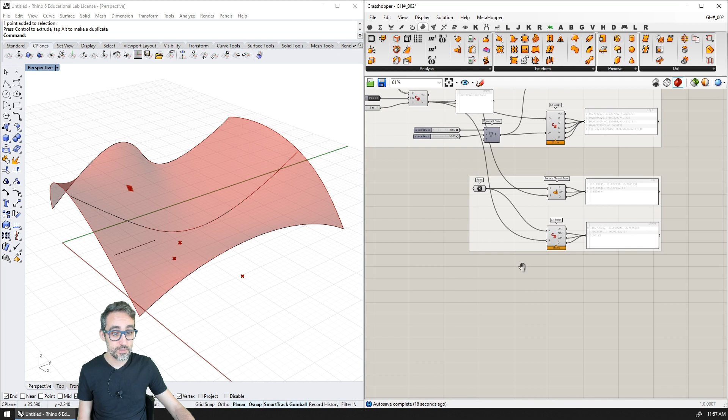So this was surface closest point, and with this I am wrapping up this video. We implemented a lot of vanilla Grasshopper components that have to do with geometry. We learned a little bit about reading from the RhinoCommon documentation and figuring out how to perform these operations based on the documentation. That is a very important thing to learn when you are writing C# scripting inside of Grasshopper, or in general when you're using somebody else's libraries.

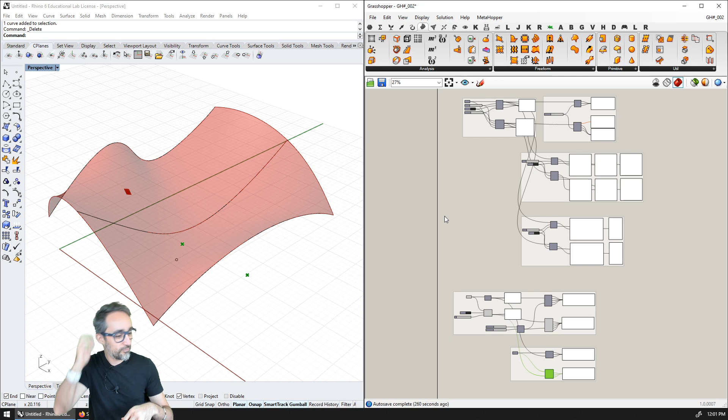And that's it. Whoa, I'm really tired today. I don't know what have you guys done to me? Huh? Oof, oof. Well, if I'm tired, I don't know. I don't know how you guys are going to feel about all the stuff that I just dumped on you right now. Okay.

All right, I'm gonna open it up to some Q&A. Aman is asking whether I can guide folks to some resources on custom code for the Delaunay triangulation algorithm.

That is actually a really interesting topic. I cannot point you to a good reference, but I would be interested in perhaps giving it a try. I've never implemented Delaunay from scratch, but I could take a look. I don't think it's that hard. I think doing it fast in an optimized way is not straightforward, but I could take a look and maybe we can just do it here as part of the stream. Actually, that's a good idea. I am going to write it down as a suggestion—this could be a geometry gem. Delaunay from scratch, that could be a good topic. But no, off the top of my head, I don't really know a good resource. Sorry.

Vakaris says that I am a machine. I'm going to take that as a compliment because I think that's what you mean. But I would like to think that I'm still human a little bit. I spend a lot of time with robots and neural networks, and the more time I spend with those, the more I appreciate my flesh and my emotions and my feelings. So I'm conflicted. I want to be a machine, but I also want to be human. I don't know where I stand on that one.